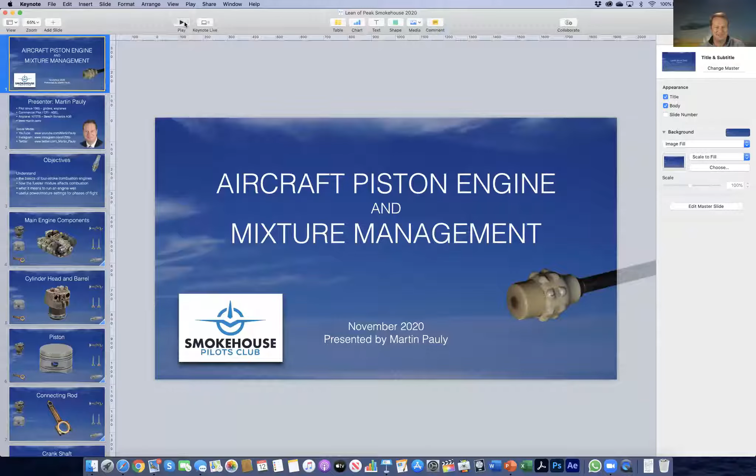All right. So this is me. Been a pilot for over 30 years. I started at the age of 14. Back when I lived in Germany, I flew gliders, and sometimes I joke that that's where my obsession for lean of peak comes from. And then later on airplanes. I have a commercial certificate. This summer I became a CFI. I was a glider instructor in Germany, then didn't instruct until this year, but picking that up again and enjoying it so far. The Bonanza that you see here behind me on the backdrop, that's mine, 70 Tango Bravo, an A36. That's been mine since 2012 with a normally aspirated engine.

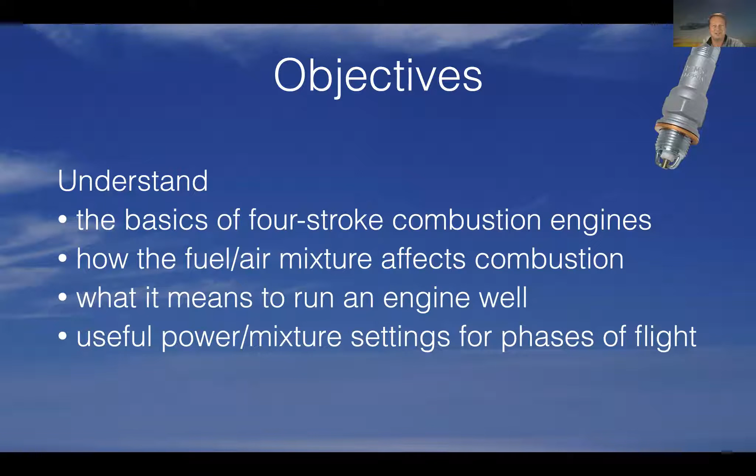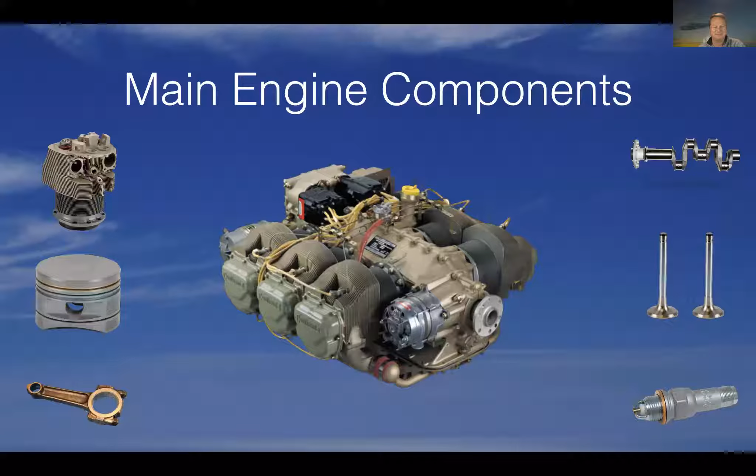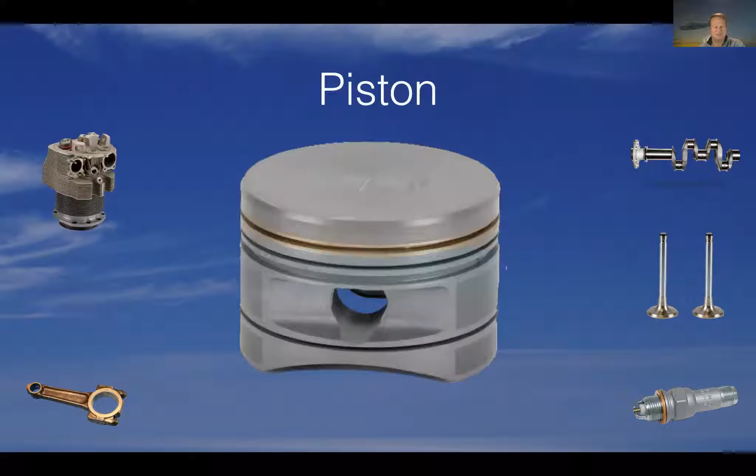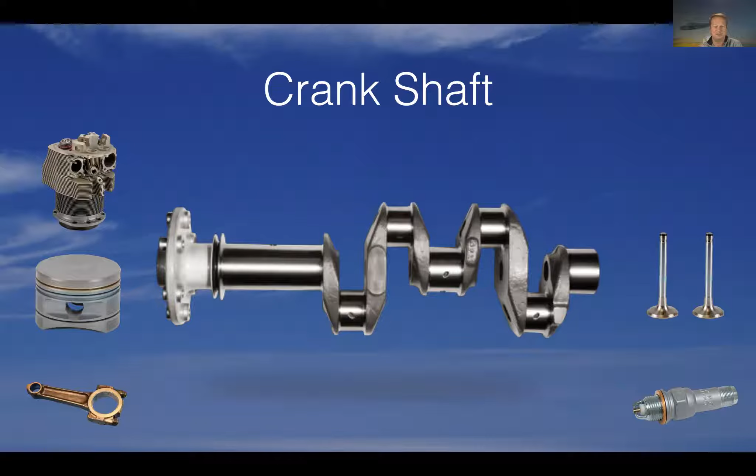All right, so here is a typical engine, 6-cylinder Continental here, and we got the case in the middle, right? And then we got the cylinders, cylinder head and barrel, inside of which we have a piston that's moving up and down. And the piston is connected to one end of the connecting rod. The other end of the connecting rod goes to the crankshaft. And that mechanism translates the up and down movement of the piston into rotating movement of the crankshaft. Bet you're all familiar with that.

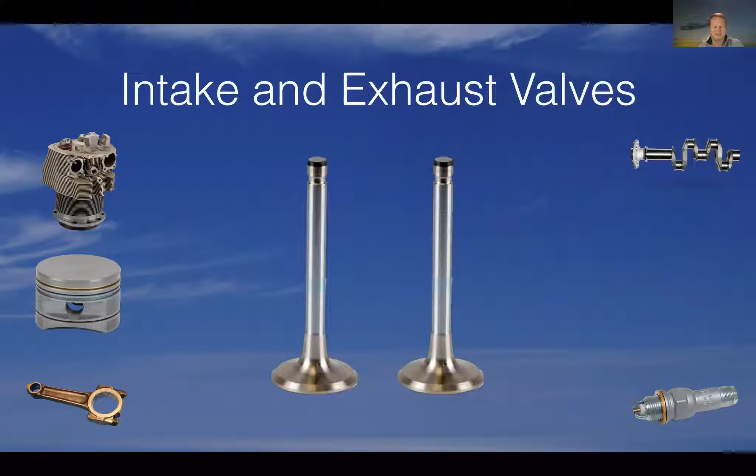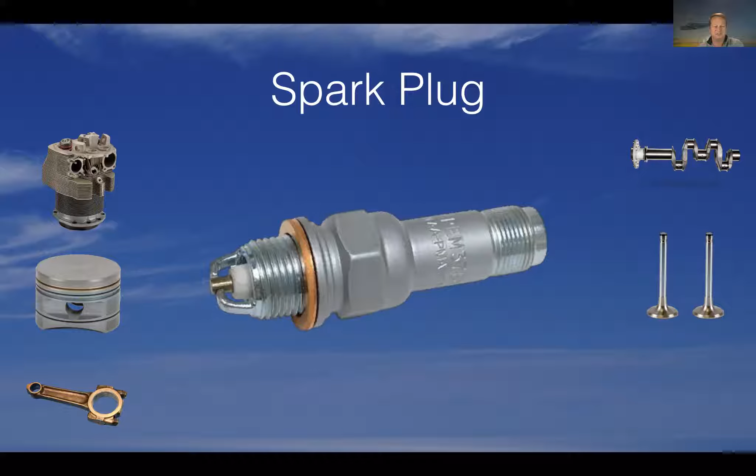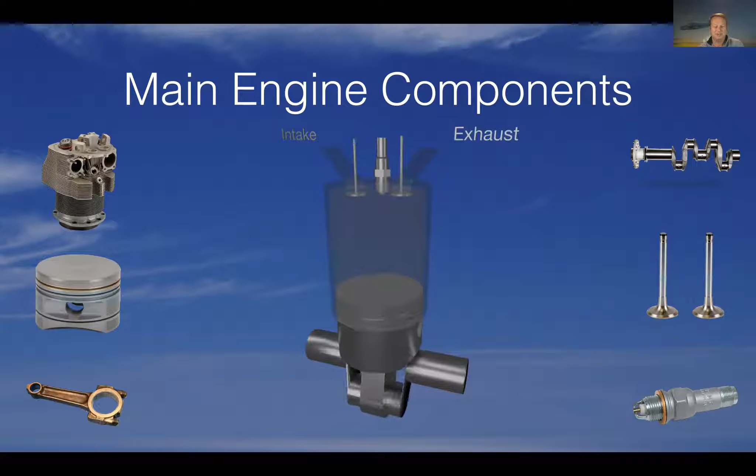Then we got intake and exhaust valves that open at the appropriate time to let air and fuel into the cylinder, or let the burned air and fuel out of the cylinder. And finally, a spark plug to ignite that fuel-air mixture. There's a lot more needed to make an engine, but those are the components that we are looking at tonight. And we put them together and we put them to work. It looks like this here, with the piston moving up and down, and the intake and the exhaust valves opening, and the spark plug firing at the right time. And let's look at this for each of the 4 strokes individually.

So starting with intake, you can see the intake valve, the left one, opening, and as the piston is moving down, it sucks in air and fuel, a lot of air and a little bit of fuel, into the cylinder. The next stroke then is the compression, where the piston moves back up, both valves are closed, and that air-fuel mixture is now compressed, put under pressure.

And just before the piston reaches what's called top dead center, when it's all the way up, the spark plug fires, this fuel-air mixture starts to burn, and as it burns and creates pressure and heat, that pressure is moving the piston down, and that is what's creating the power. And then finally, the exhaust valve opens, and the burned fuel and air that is no longer of use gets ejected. And then we start over.

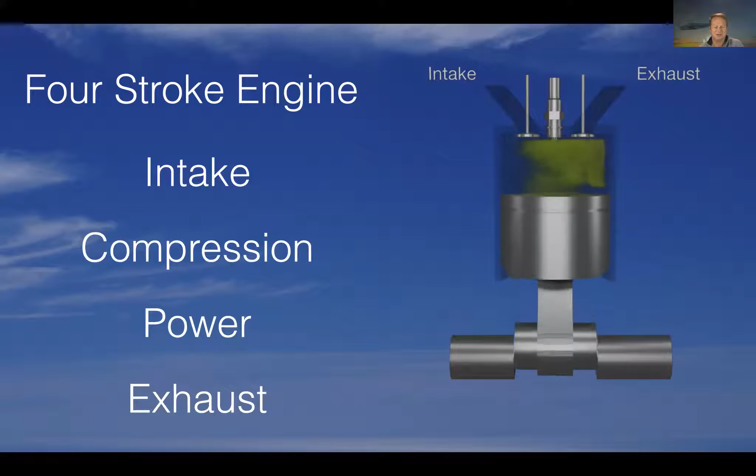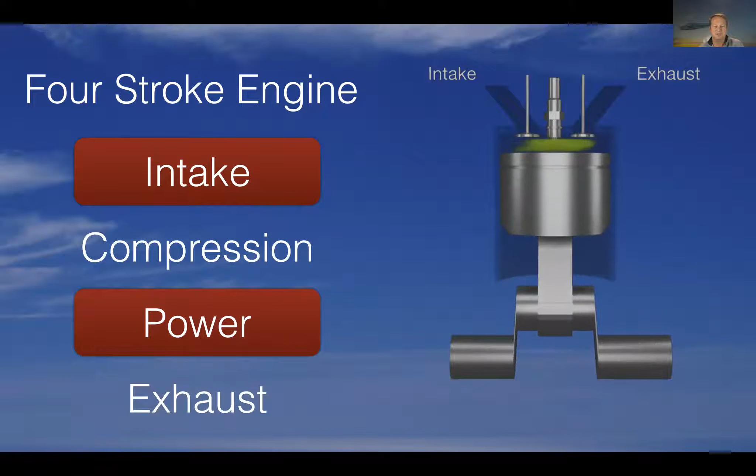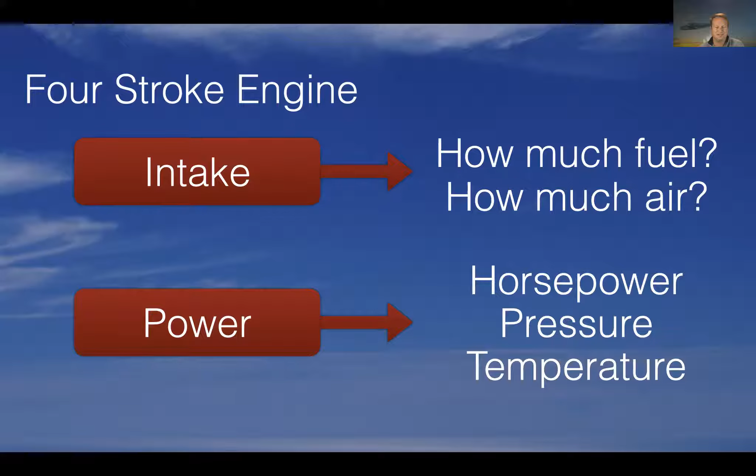Intake, compression, power, exhaust. And from here on, we're going to look at intake and power. I mean, compression and exhaust are important, but we don't really control them or get much out of it. Intake is where we have full control. We control how much fuel and how much air goes in. And then during the power stroke, we yield the results out of that, which is horsepower and pressure and temperature. And that's what we're going to look at here for the remainder of the time.

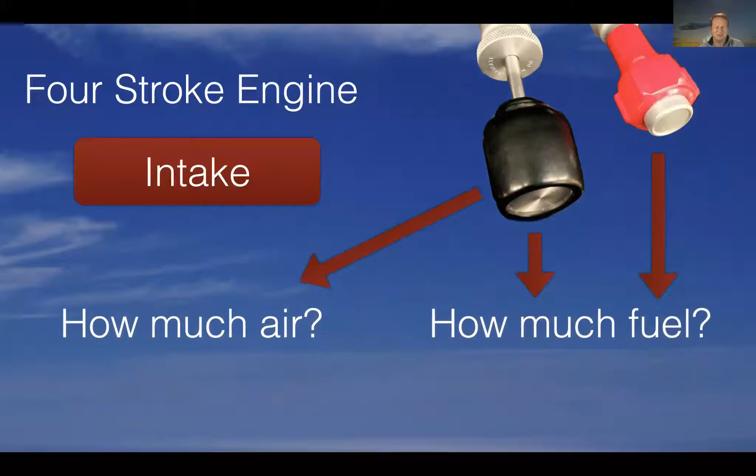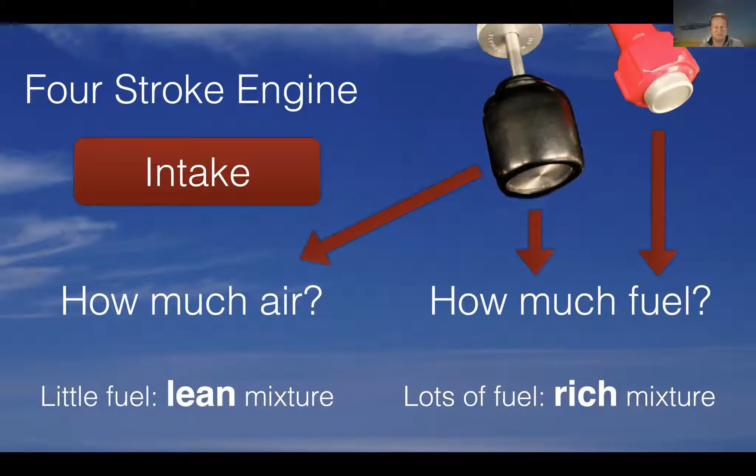How our choices of how much air and how much fuel get into the cylinder affect the outcome. We control that with throttle and mixture, right? Throttle controls air and fuel, and then the mixture gives us additional control over fuel. But so far, I probably haven't told you much that you don't already know. As we control that fuel, there are lean mixtures and rich mixtures, and a lean mixture is one with relatively little fuel. A rich mixture is one with more fuel.

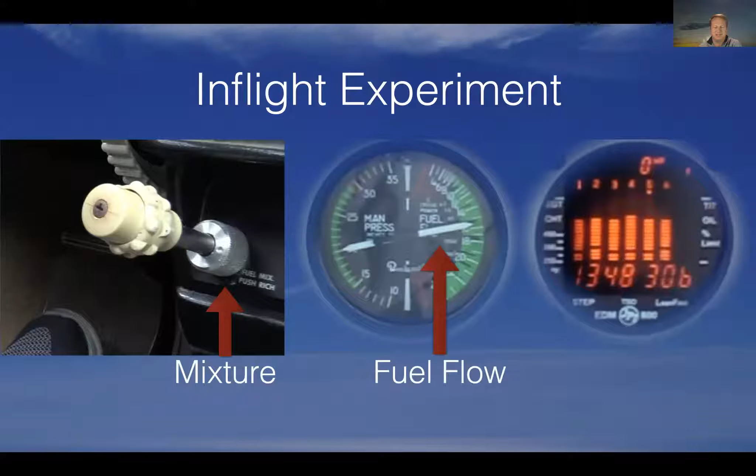All right, now let's make this a little more interesting and collect some data, make some observations. So this was taken in my Bonanza a few years ago in cruise, I think probably 8,000 or 9,000 feet high. Wide open throttle. This is a normally aspirated engine. And you can see here the mixture knob on the left. You can see the fuel flow gauge, showing about 15.5 right now. And then on the digital engine monitor, this is the old one before I upgraded to the EDM 930. This shows the readout just for one cylinder at a time of the exhaust gas temperature and cylinder head temperature.

So mixture, right? Everyone knows that knob from flying. Fuel flow, that's pretty easy to understand. If I pull the mixture knob out, the fuel flow goes down. EGT and CHT, many of you will know this, but here we're starting to get into terms that many pilots have heard about, but maybe they don't exactly know what they are or what to do with them. So let's look at those for a moment.

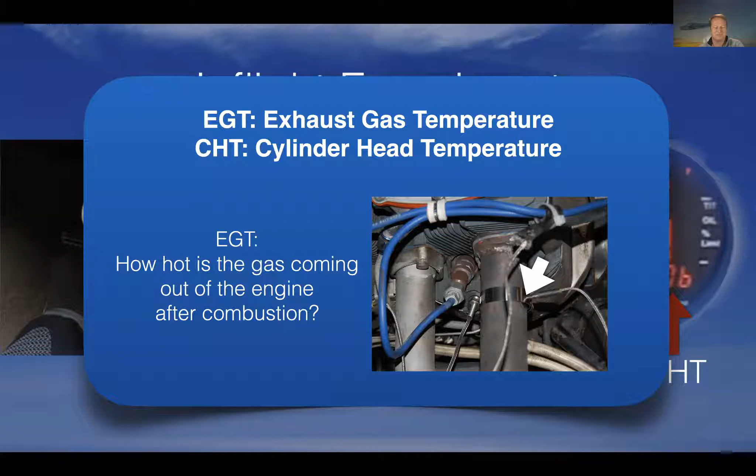The CHT, it's a different probe. It's a little hard to see. It's at the bottom here. The arrow points at it here. That measures how hot the metal of the cylinder is. So the temperature of gas and the temperature of metal. And we'll talk about what they're useful for and what to do with them.

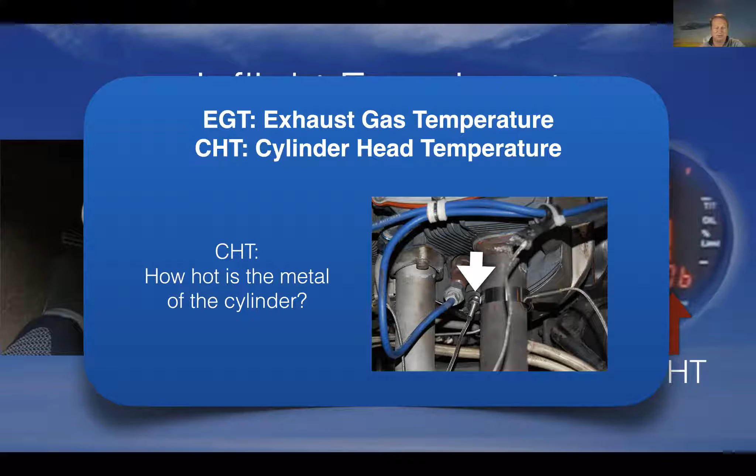But an analogy that may be helpful to think of it is EGT is a bit like the temperature of a flame on a stove, and CHT is a little bit like the temperature of the pan that's sitting on the stove that you're warming up with that flame. By changing the flame, you can change the EGT or the flame temperature very, very rapidly, right? You add gas, it gets hotter, the flame gets bigger. The CHT equivalent, the temperature of the metal of the pan, lags behind just because there's mass in that pan and it takes time to adjust to the changes of the flame.

And likewise, the EGT responds very, very quickly to changes that we make with the mixture and throttle, whereas the CHT always lags behind. It can take a minute or two after we make a change before the CHT stabilizes.

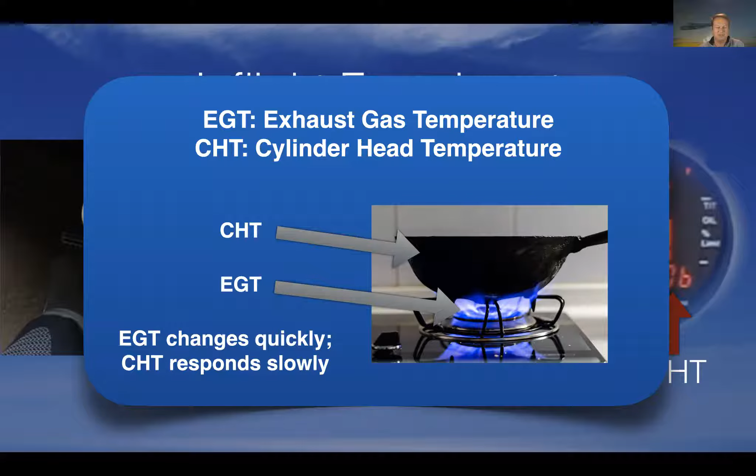So let's get back to the experiment here, and I'm going to show you what happens when I pull the mixture knob out. You notice here we have a starting fuel flow of 15.3 gallons per hour, which I'm reducing now. The EGT started at 1348 degrees Fahrenheit. And as I'm reducing the mixture, just observe what's happening. The fuel flow needle goes down. I mean, that's obvious, right? That's what pulling the mixture does.

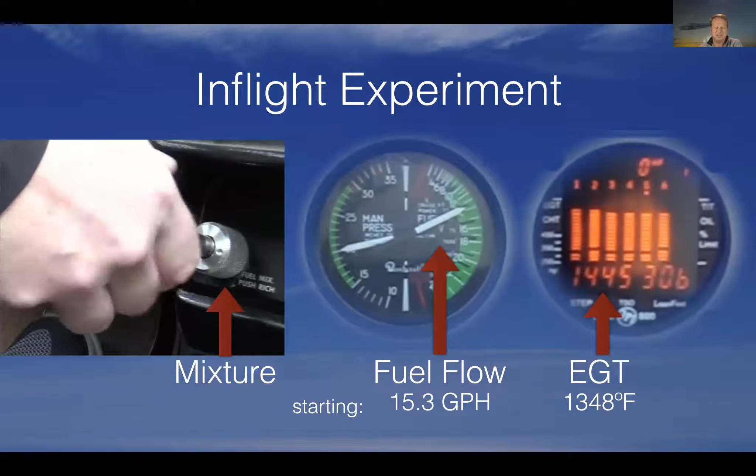Means less fuel. But the exhaust gas temperature, the temperature of the gas coming out of the cylinder after each combustion stroke, is rising. And now I'm pulling out and I'm not seeing much change. 1447 was the largest number here. It's kind of reaching a plateau. And now as I'm reducing the mixture further, the numbers are starting to go down again. 1420 now. Yeah, and here I stopped.

So what did we see? We saw the fuel flow that I very gradually moved from 15.3 gallons per hour to 13 gallons per hour. And we had an EGT that started at 1348 that rose to 1447. There was a peak there. And that in the end ended at 1415. So that's just a bunch of numbers right now.

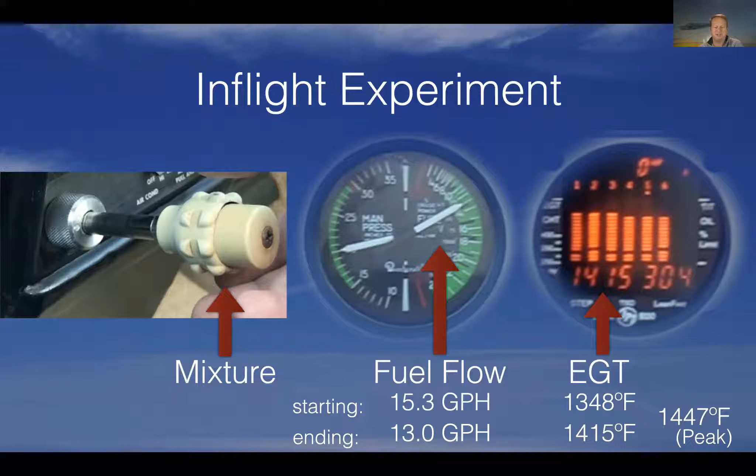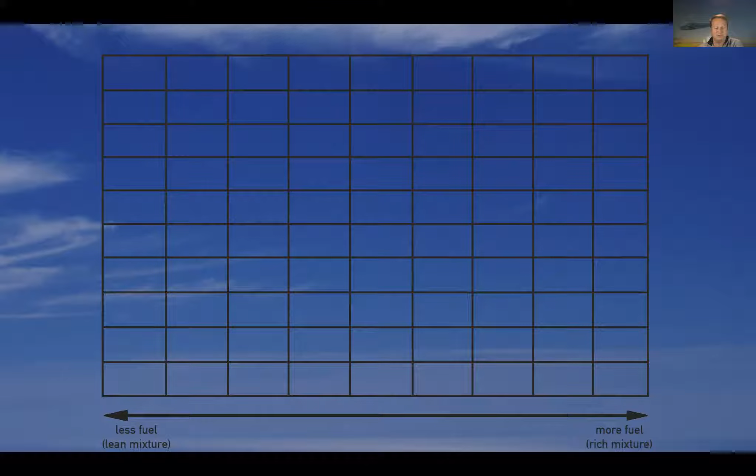And when we try to make sense of numbers of data that we record in an experiment like that, it often helps to show that in a graph, to plot the data. And that's what we're going to do here. So I have this graph here where the horizontal axis is the fuel flow. I got a lean mixture, less fuel on the left, and a rich mixture, more fuel on the right.

And I'm simply going to draw a line here that represents what we just observed for the exhaust gas temperature, right? From the right to the left, as I was pulling the mixture knob out, we saw the EGT rise and rise and rise, and then it slowed down, and there was a peak, and then it went down again. And that may not look all that exciting by itself, but let's stick with this a little moment and see what we can get out of it.

So first, I'm drawing this thick vertical line here to mark where the peak EGT was reached. That was the 1447, right? The EGT goes down on either side, and it divides this chart into a lean of peak side and a rich of peak side. That's literally all these terms mean. Everything to the right of this line, where the mixture is richer than when EGT peaked, is called rich of peak, and everything on the other side is lean of peak. And then we have peak itself, right? That's the one place where we got the maximum EGT.

But if people talk about lean of peak and rich of peak, well, that's what that is. There's that dividing line in this chart, and one side is rich of peak, and everything on the other side is lean of peak. I don't have numbers here on this chart, and there are a few reasons for that. One is the absolute numbers are really not important. Numbers depend a lot on a number of factors, including, for example, how far down the exhaust stack that EGT probe is mounted. So an EGT really isn't right or wrong or too hot or too cold.

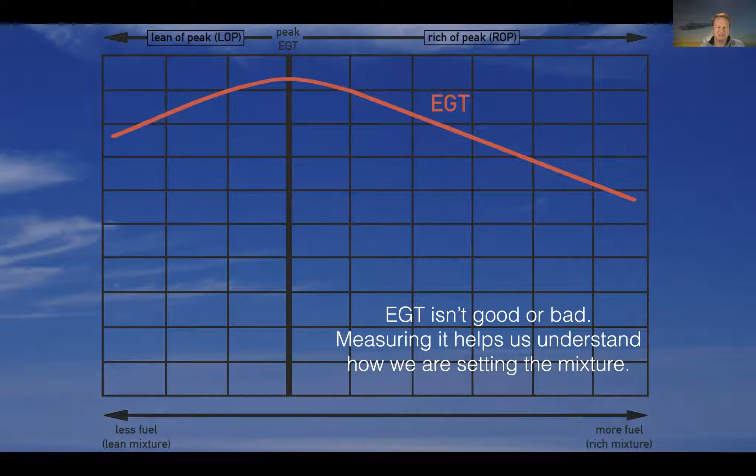EGT is a reference for us here to talk about this chart, to talk about mixture settings. What do I mean by that? Let me add 3 points that we observed in the little video earlier to this chart here. One is at peak, we had an EGT of 1447, and then to the right we had an EGT of 1297, and on the left 1417 on the lean of peak side. And the vertical axis here is degrees Fahrenheit for EGT.

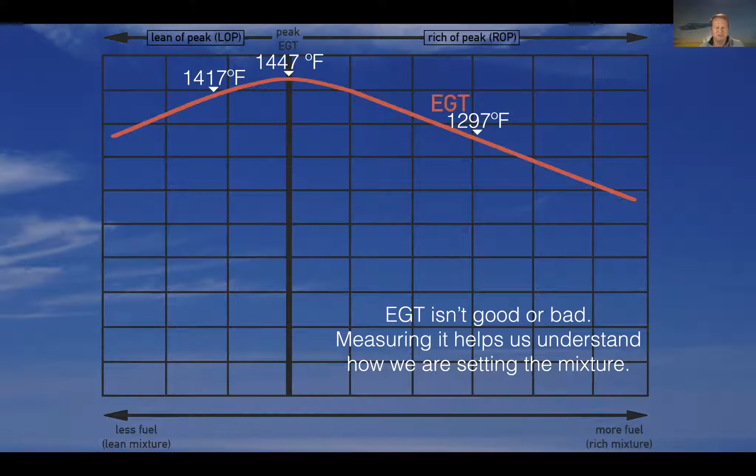If I want to talk about my mixture settings, I could use gallons per hour, or I could say I moved the mixture knob half out or so, but that's not always very meaningful. It turns out a very, very meaningful way to talk about mixture settings is to talk about how many degrees lean of peak and rich of peak we are.

So to use the example here on the left, when we have 1417 degrees Fahrenheit, that is exactly 30 degrees below the peak EGT of 1447. And we call that 30 degrees lean of peak. That is a mixture setting. And we'll soon learn that 30 degrees lean of peak is in many ways a lot more meaningful than saying, well, I leaned to 8 gallons per hour.

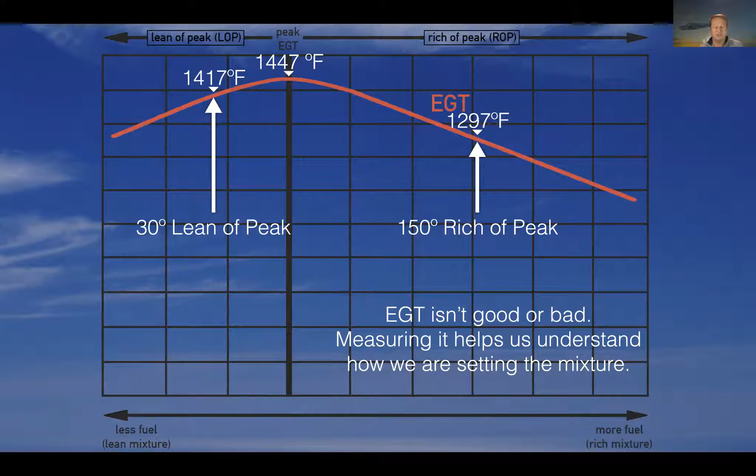Similarly, on the rich side here, this 1297 is 150 degrees below the peak of 1447. So we call that 150 degrees rich of peak. So you see what we're doing here. We're using EGT to kind of navigate on this chart, to talk about where we are with the mixture setting, and we do that by relating it to peak EGT.

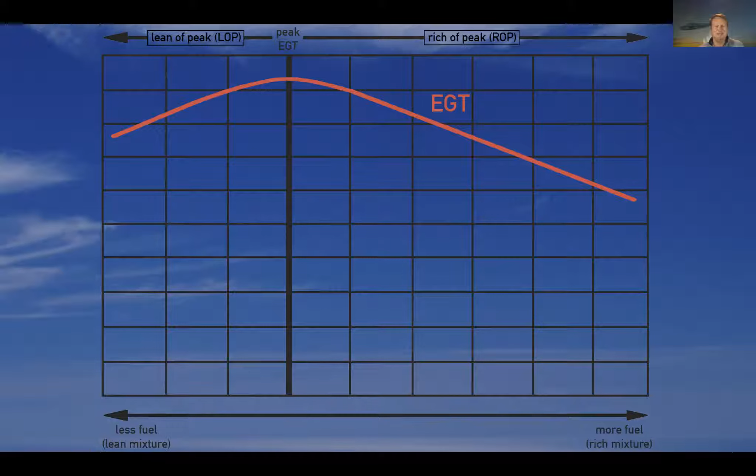Okay, so far we have this chart. We can talk about where we are on the chart, but what does it bring us? Right now we just have the EGT. We need to put something else on the chart to make it meaningful. And next we'll add the horsepower that the engine develops.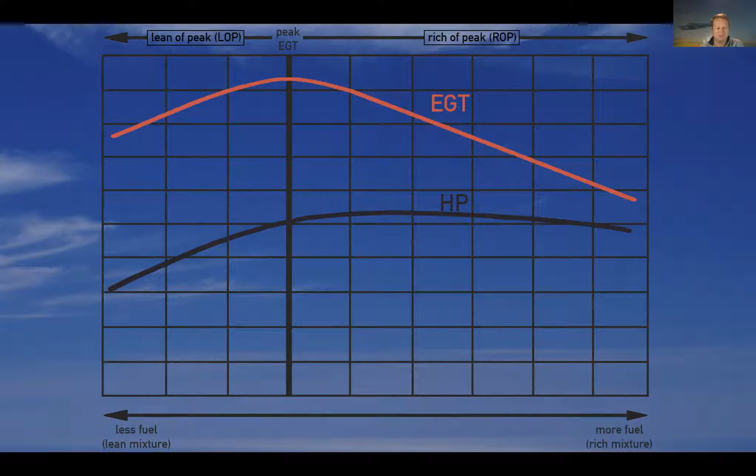Further, we can add a line for CHT, cylinder head temperatures. And this is assuming that we give the engine a little time to let things stabilize. How hot will the metal of the engine get with the mixture setting that we've chosen? That's what this CHT line suggests. And it also peaks again in a different place than the horsepower or the EGT.

So now we have something more useful, because, for example, if we wanted to produce maximum horsepower output, we could find out from this chart how to set the mixture to get there, and not just guess, but we would actually know it. Or if we wanted to get the CHTs cooler, we could use this chart to get an idea of what we need to do with the mixture to achieve that. So this is starting to look a little more useful.

So to recap, we have so far looked at the exhaust gas temperature. And again, there's no good or bad exhaust gas temperature, but it helps us understand where we are on this chart. We can communicate about this chart with 20 degrees lean of peak and 50 degrees rich of peak and the like.

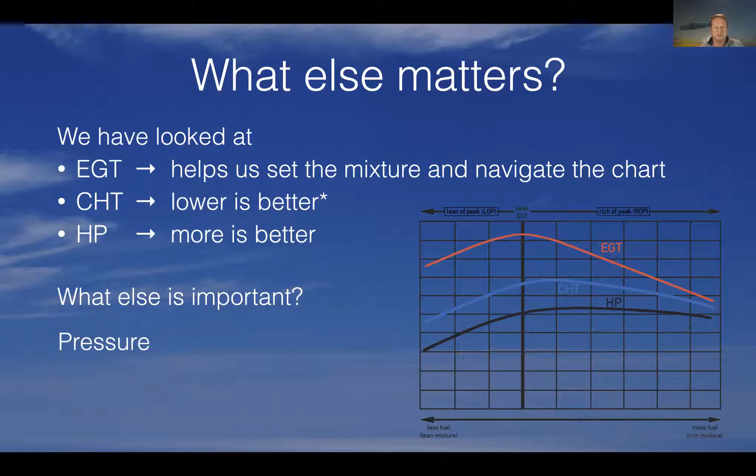Now there's no gauge inside the airplane that measures pressure directly or indirectly. However, on a test stand that has special probes to measure the pressure inside the cylinders, the internal cylinder pressure, ICP, you would get a curve that looks exactly like the CHT. The units of measurement, of course, would be different. But how it slopes and where it peaks is almost the same as the CHT.

So I'm not going to add another curve here. We're simply going to look at CHT to understand where we get peak pressure and how the pressure gets lower to either side.

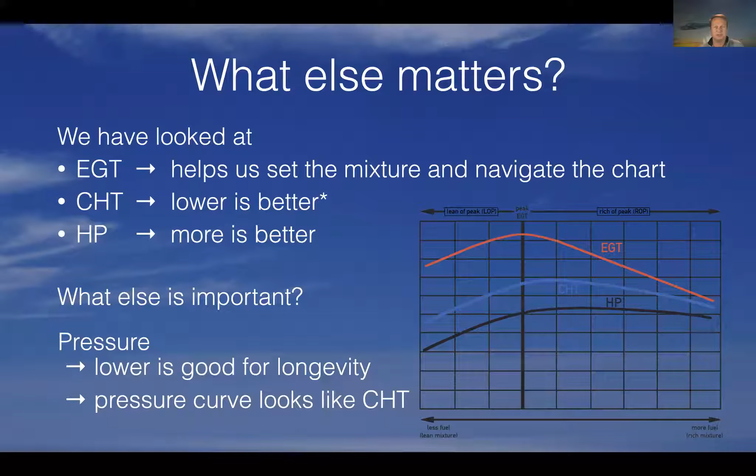So with all these parameters in mind, how should we run the engine? What do we want from the engine when we fly? We want power, as much as we need for the phase of flight. There can be very little for taxi or descent, and very much for takeoff and climb.

And the most power is achieved at approximately 80 degrees Fahrenheit rich of peak. So if that is the absolute most important, that's where we would set our mixture, 80 degrees rich of peak. And if that was the only thing that mattered, we'd probably be flying at that mixture setting all the time.

But there are a few other considerations, like fuel efficiency. What do I mean by that? Well, fuel efficiency, to me, is the number of nautical miles that I can squeeze out of a gallon of fuel, just like the gas mileage in your car, right?

And more is better. It extends my range, and it can even help with speed, right? Maybe I can skip a fuel stop by getting more miles out of the fuel that I have available.

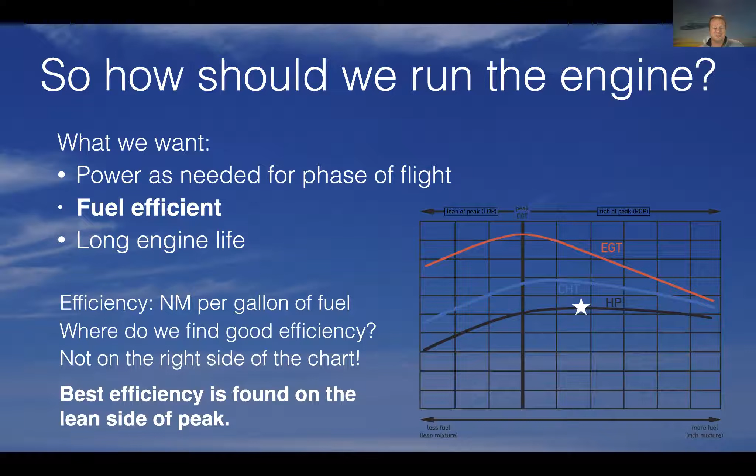That's not efficient. So the best efficiency is found here on the left side of the chart, and that's the lean side of peak. If we want the maximum miles per gallon, that's on the left side, on the lean side of peak here. And then finally, we want a long engine life. At least all of us who are paying for engine overhauls or replacement, I bet want that.

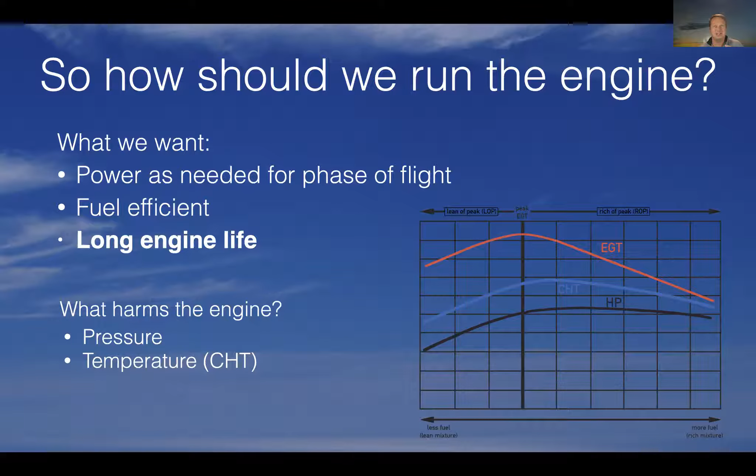And let's think about what harms the engine, and it's pressure and temperature. They work in combination. Pressure, if I push something too hard, I can deform it and break it. And if something gets too hot, it gets weaker. I make it more likely that that pressure will harm it. So unfortunately, the CHT and the pressure curve, they overlap. The point where I get the highest pressure is also the point where I get the highest temperature, where I make the assembly the most vulnerable to that pressure. So that's an important consideration.

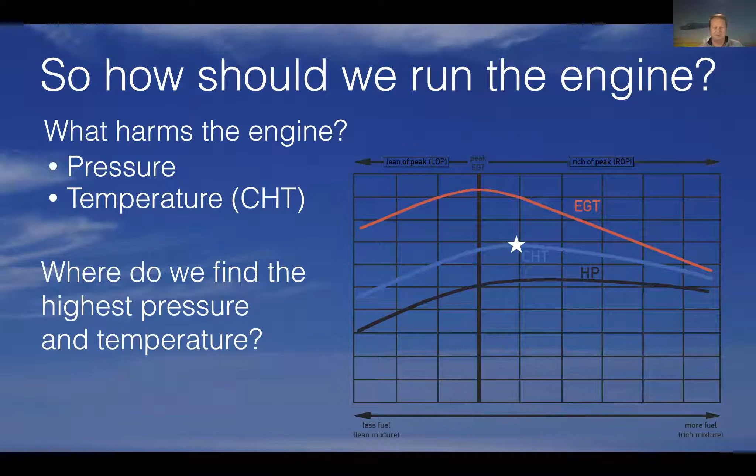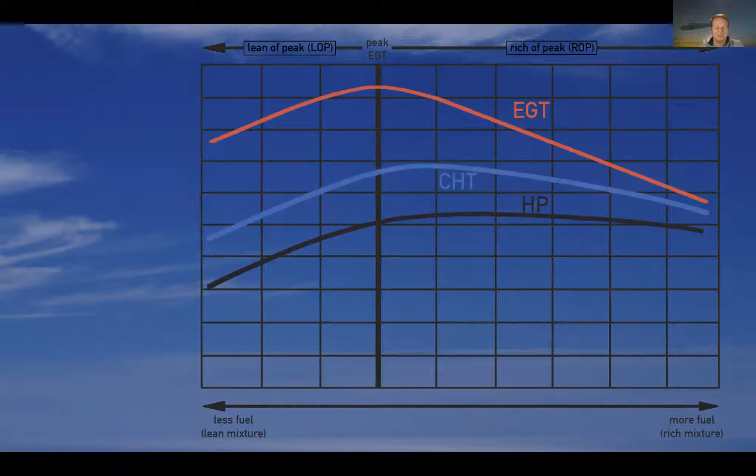And there's another name for this red box, sometimes called red fin. I believe Cirrus pilots use that term. It's a slightly different diagram showing things in a different arrangement, and then it doesn't look like a box. It looks like a little triangle, so they call it the red fin. But it's the same thing, same concept, really, just drawn differently.

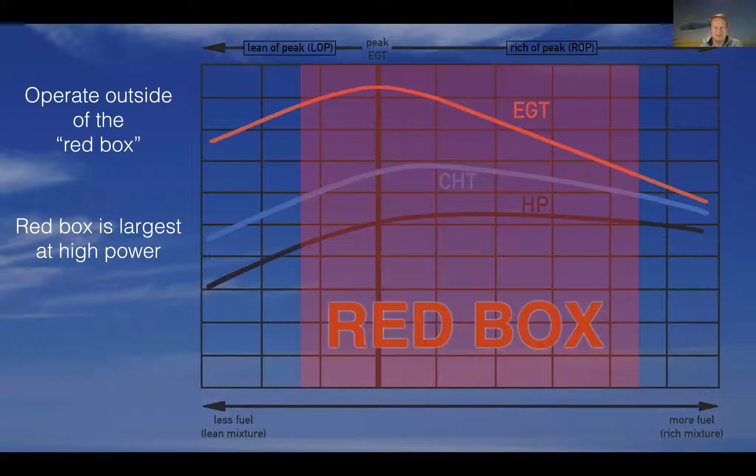The red box is pretty large. It occupies most of this diagram here at high power settings. Now, when we reduce the power, for example, if we climb with a normally aspirated engine and we get to less dense air and produce less power, or I pull the throttle back, that red box gets smaller. My peak pressure and peak cylinder head temperature is still at the same place, but the absolute pressure and temperature are not so high anymore. And that's why the red box gets smaller as the power output of the engine decreases.

And if I take even more power out, say 65% or below, the red box disappears. I can now do whatever I want with my mixture. I can run at peak horsepower. I can run at peak CHT if I want to. Maybe it's a cold winter day and I want to get maximum heating in the cabin. And the engine will not be harmed. So that's the concept of the red box.

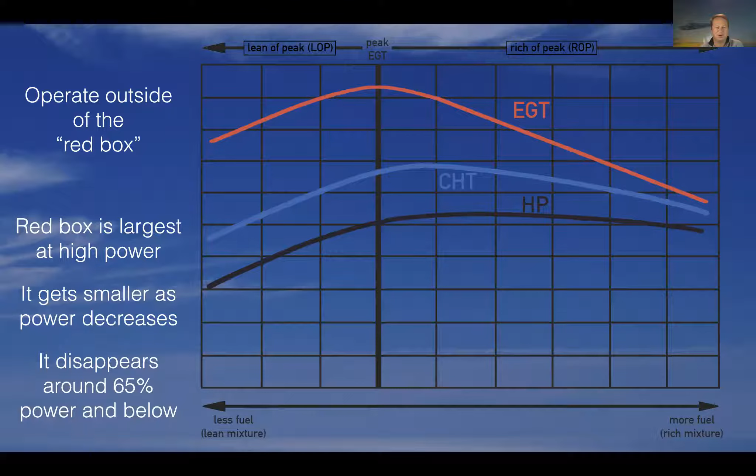Now, I told you earlier, I'd get back to the question of CHTs, should they be cool, should they be warm? And the one argument that's been around forever, that's undisputed really, is aluminum in particular is what we have to look at for our engines here, and the temperatures we find in the engine. Aluminum loses strength at higher temperatures. And there's this chart here. Temperature on the horizontal axis, and yeah, this is in Celsius. Here I got 3 lines with some useful Fahrenheit references, and then the yield strength on the left.

What's yield strength? That's the pressure that we can put on this aluminum, where exceeding this pressure, instead of just making it elastic, it would deform the metal permanently. In other words, it would break something. And you can see how that strength goes down pretty rapidly as temperature increases.

460 degrees is the maximum temperature authorized for my engine, the IO-550 in the Bonanza, for the CHT. And that's kind of alarming, right? Because if you look at what that means, the aluminum only has half the strength of what it has when it's cold at 460. So I don't like 460. I like to look at 380. It's kind of the maximum where if I exceed that, I need to do something about it to get below 380.

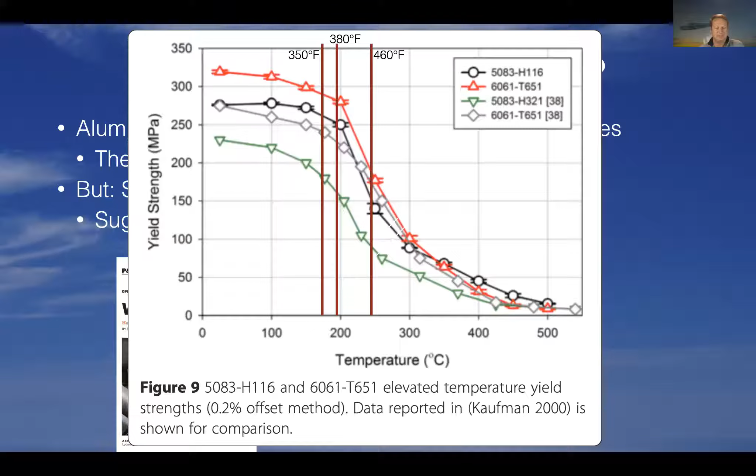There's another argument, and it was recently made this summer by Mike Busch, and here's an article from AOPA Pilot. What he says is there are deposits on the valve stems that increase if the temperature isn't hot enough. If the valve stem is too cool, there's condensation, and some deposits then get onto the valve stem, and they can make the valve sticky.

I haven't studied this enough, to be honest, to have a really good opinion. I haven't heard a lot of people other than Mike talk about this. So I can't tell you that this is right or this is wrong, but I did want to throw it out here because it is an interesting discussion going on these days.

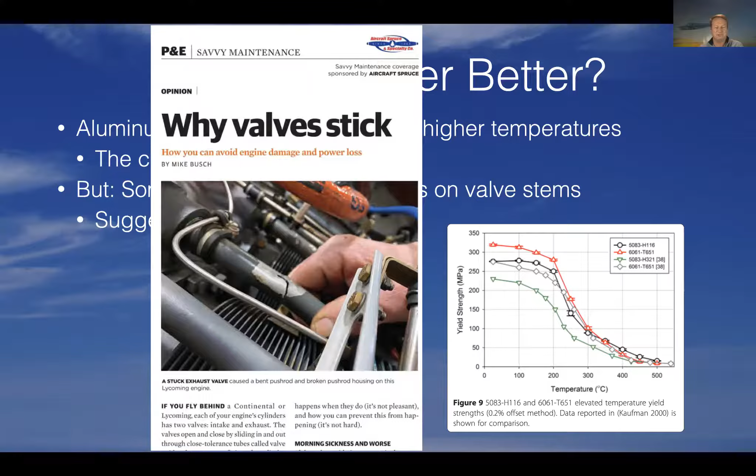What Mike suggests, oops, let me go back here, is to operate with CHTs between 350 and 400 degrees. And he hints that this may be more important for Lycoming engines than Continentals, because Lycomings have a different design of the valve stems. They run a little cooler than Continental, and that may actually, ironically, be harmful for them, the more efficient cooling.

What I can tell you, I ran my Continental IO-520 to 2,600 hours, running it with the motto of making it as cool as possible. So a lot of people have been successful with cooler is better, and I guess time will tell just how important this minimum temperature is, if you will.

One thing I would stress here is if you want to pick your poison and go really, really hot or really, really cold: really, really hot, think 500 or more, can damage your engine in no time at all. I mean, we're talking minutes at those high temperatures, and you're not far off from detonation and other bad things, and that quickly leads to a spiral that, if you don't react very quickly and do something about it, the engine may be destroyed in flight.

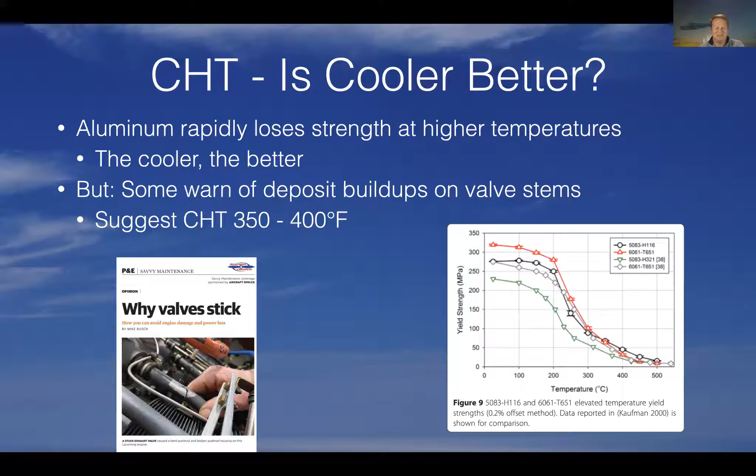Okay, so now let's get to the application. How can we use all of what I talk about here in flight? And I'll apply that to an airplane like my Bonanza with a normally aspirated engine. If you have a turbocharged engine, then some things will be different. But let's use it as a learning tool to understand how we can use the mixture control to our advantage in the different phases of flight.

So let's begin with startup, and I would say that the two most important things here are, one, make sure the oil is warm enough so it can provide lubrication, right? We're getting into cold season here, so preheat the engine. That is really, really helpful, and aim for low RPM when you start.

There's probably no easier way to ruin an otherwise perfectly good engine than starting it cold and having the throttle forward so that it revs up to 1,500 or 2,000 RPM right after starting, right? Cold, no oil yet. That's where a lot of damage is done. And so if you preheat and figure out your throttle setting for a low idle on start, that will be very, very good for your engine.

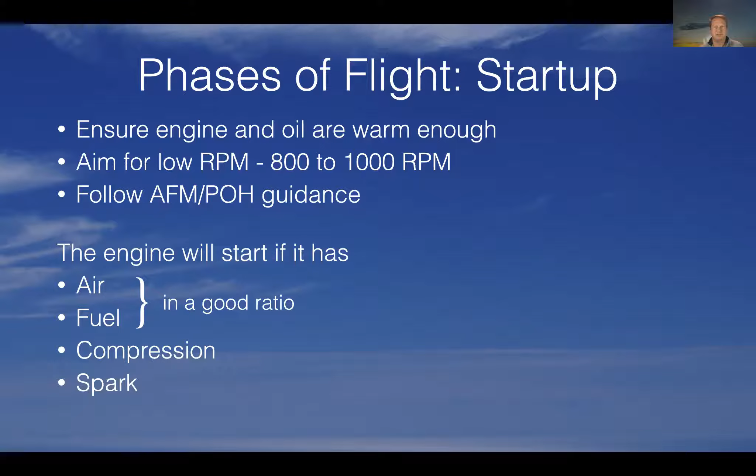Compression and spark, as long as everything is in good working order, if you crank the engine, you have compression, you have a spark. You also have air, because you're not yet sucking in much, so you have ambient air pressure going to the intake port. So really, what you control is the fuel. And if you have trouble starting the engine, that means that you either have too much fuel or too little fuel. And it's just a matter of understanding your fuel system and getting that mental picture of how much air is there, how much fuel is there.

Did I flood the engine or did I not give it enough gas, and then correct it. That is true even for the dreaded hot start, right? If you have trouble with that, again, air, fuel, compression, and spark, and it'll work. And in a hot start, what I often see is that people use too much fuel, and then they might think they have too little, and they add even more, and they make their lives even more miserable.

But it's hard to give very specific guidance here because the specifics depend a lot on the aircraft and the engine that you have, and the fuel system in particular. But understanding that fuel system and understanding how much fuel and how much air is in the cylinder is the key to a successful start.

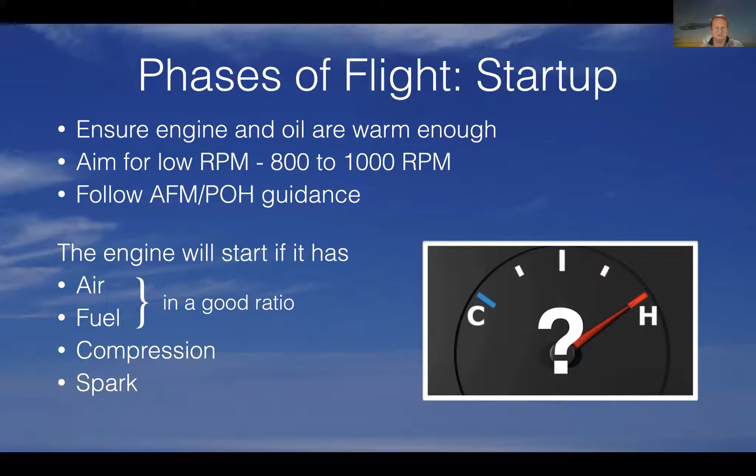Let's say we get that successful start accomplished, and now it's time for taxi or anything we do on the ramp. What I like to do is lean very aggressively for any ground operation. And with aggressively, I mean to the point where further leaning would make the engine run rough and stumble. That helps prevent spark plug fouling, and doing it aggressively will help you not forget to go rich again before

you go to takeoff. Because if you have the mixture knob pulled so far back that it almost stumbles, an attempt to go full power with the throttle would kill the engine, as opposed to taking off with a half-rich mixture where we might end up in the red box because the fuel flow isn't high enough. So if you do lean a lot, you prevent that possibility on takeoff.

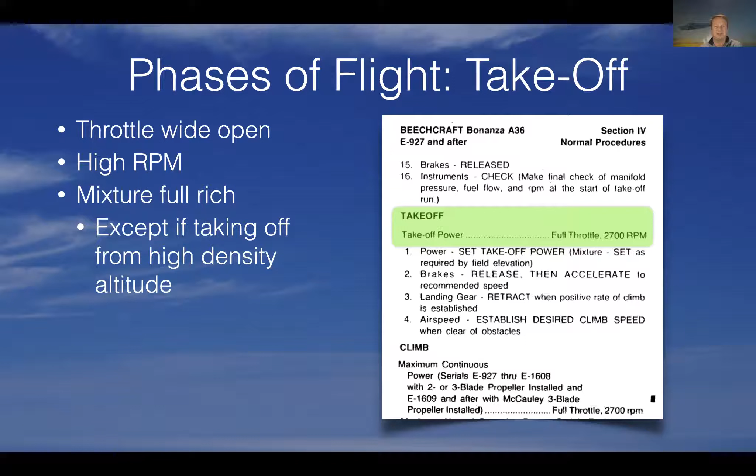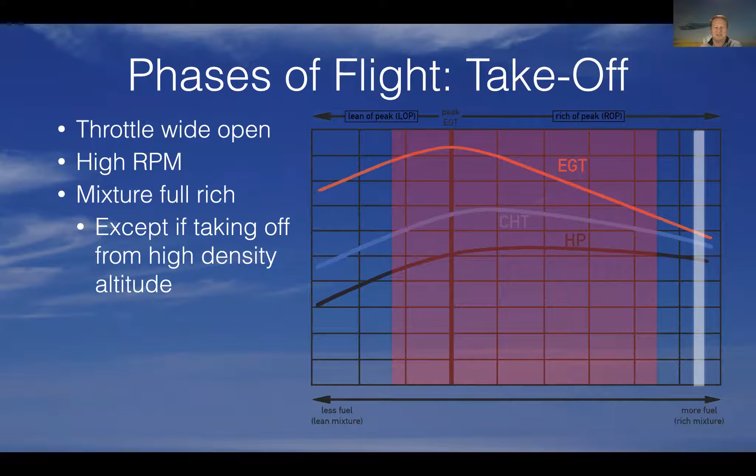Now, initial climb, we're a couple of 100 feet in the air, and what do we do now? And there are different schools of thought, different opinions. What I say is, don't change anything. Don't go to 25 squared or whatever people may tell you. Again, your POH may have limitations for how long you can run at full power or full RPM, and of course, those are important. But absent those limitations, just leave everything the way it is for the initial climb.

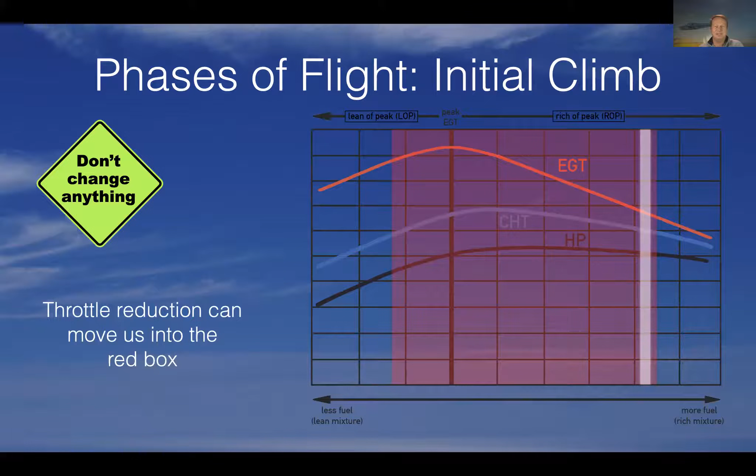And here's why. If I reduce the throttle right now, with a good intent of not working my engine too hard, most of our airplanes are set up such that full throttle gives it an extra little bit of fuel, and it does that so that I'm very, very rich and I'm not in the red box. Now, if I reduce the throttle, I get a fuel reduction, and that can take me into the red box. So I'm actually getting into the more harmful operating area for the engine. Therefore, I leave everything forward, throttle full open, for the initial climb.

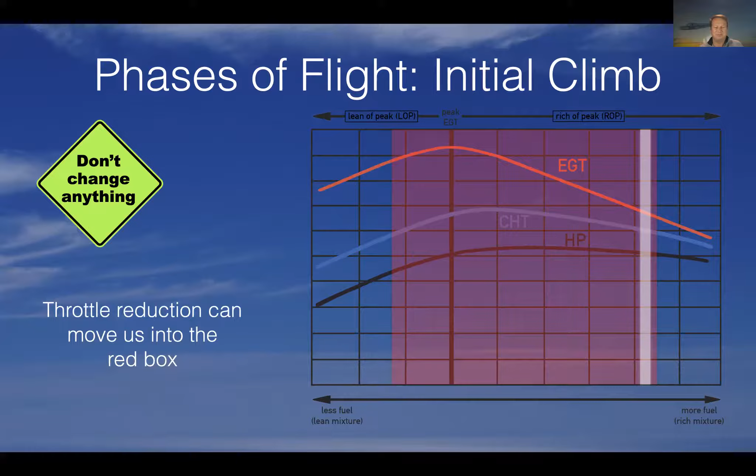Now, let's look at the rest of the climb here. And again, my POH says I can run full throttle, 2,700 RPM all day long. Most of the time I climb rich of peak. It is possible to climb lean of peak. Climb rate's reduced, and I climb more slowly. The vertical speed is slower, so the climb takes a little longer. But it's a choice I can make to go rich of peak or lean of peak. So let's look at either one.

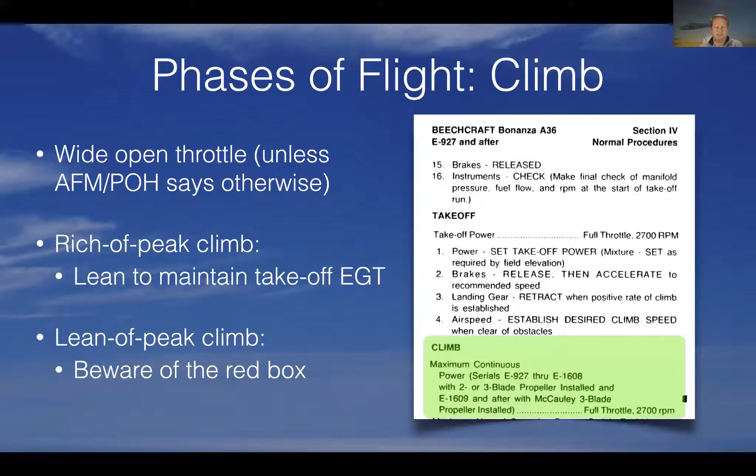Rich of peak, this was where I was for takeoff, right? And everything was good. And as I climb, I get into less dense air. So my fuel air mixture, unless I have an altitude compensating fuel pump, gets richer.

So as I climb, I can lean. And it's easy up to that point, but how much exactly should I lean? And the answer is, look at your EGT. Pick any one cylinder that you have on your engine monitor and look at the EGT as you apply full power on the runway, at or near sea level. And say that EGT is 1300.

Now, as you climb, that EGT will be lower and lower as the fuel air mixture gets richer. Simply lean to keep the EGT at 1300. And that means you keep the picture here with the highlighted bar on the right. And that will be a good power setting for high power without the damaging CHTs and pressures. It's called the target EGT method. So note on takeoff what EGT you get and simply lean to keep that EGT.

If we climb lean of peak, we've got to be careful, because if we climb now and get into less dense air, our mixture gets richer again, and that takes us into the red box as the moving bar here just showed. And that is why a lot of people say you shouldn't climb lean of peak. There's nothing really bad or dangerous about it, as long as you make sure you stay on the far lean side. But if you neglect the mixture knob here, if you don't pay attention, you get into the red box. And if your power is still high in the climb, then that could obviously be a problem.

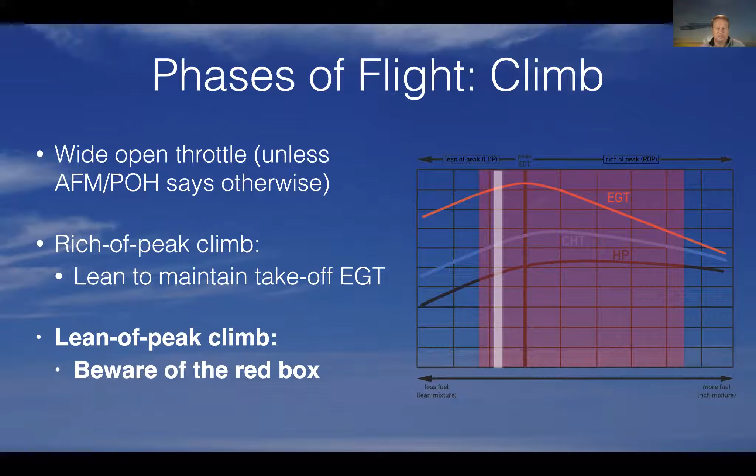Okay, climb is behind us. We're in cruise, and again, we have a choice. We can cruise rich of peak or lean of peak. And the values that I give here as guidance are very rough, right? They depend on a lot of things, but roughly speaking, for best speed, aim for about 150 degrees rich of peak. Maybe a little lower if you're not making a lot of horsepower, if you're higher up. And that's slightly rich of the 80 degrees rich of peak of the horsepower curve, but it gives lower CHTs and lower pressures than at peak horsepower.

And by the way, I should mention here, when I say something like 150 degrees rich of peak, we explored that earlier between the peak line and a cylinder. That vertical difference was 150 degrees. Now, our engines have multiple cylinders, right? 4 or 6. So if I put my 4 cylinders on the chart here, ideally they'd all be in the same spot, but they never are. Nothing is quite perfect in a piece of machinery like this. So we'll end up seeing them in slightly different places.

And the 150 degrees rich of peak means I reference the cylinder that is closest to the peak EGT line on this curve. In other words, if I were to lean and these four circles were going to start moving to the left, that leftmost one would be crossing the peak line first. That's my reference for rich of peak, and there's a similar reference we'll see on the lean of peak side as well.

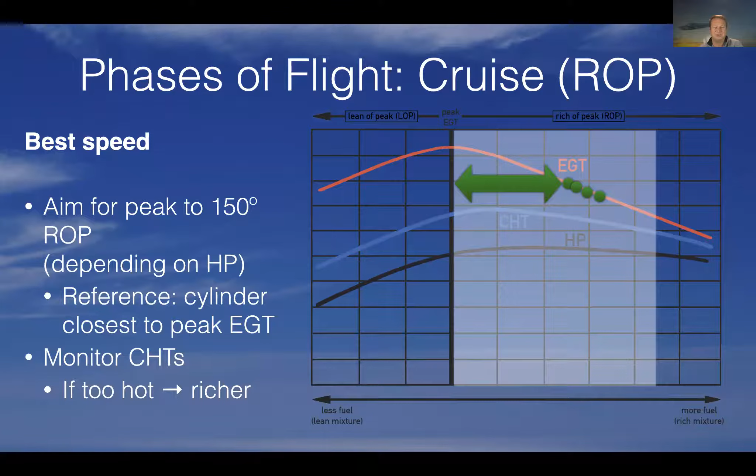Now let's look at the lean of peak cruise. And again, it depends a bit on the power setting, but roughly speaking, a window between 20 degrees and 80 degrees lean of peak is a good place to aim for. In my normally aspirated Bonanza when I cruise at 7 to 10,000 or higher, I usually aim for 20 degrees lean of peak. Same idea here with multiple cylinders. We reference the cylinder that is closest to crossing peak if I were to richen the mixture in this case.

I also monitor the CHTs. On the lean of peak side, CHTs are usually cooler. You see how steeply the slope goes down for the CHTs on the lean side. But if I were to find uncomfortably warm CHTs on the lean of peak side, for example, in a lean of peak climb that I talked about earlier, go leaner, right?

People have gotten into trouble when they experiment with lean of peak and they say, well, we don't want to overdo it, we don't want to go too lean, right? Let's just see what a little leaning does, and that has the opportunity to get us into the red box where cylinder head temperatures are high.

So when going lean of peak, and we're running too hot on the CHTs, go even leaner, and that will cool things down. If it doesn't, and you'd have to lean to the point where the engine starts to run rough or stumble, and you're still hot, something isn't right, then go full rich and work out whatever the problem is. I mean, don't stay there. But normally, if everything is working well on the lean of peak side, you can make it cooler by leaning more.

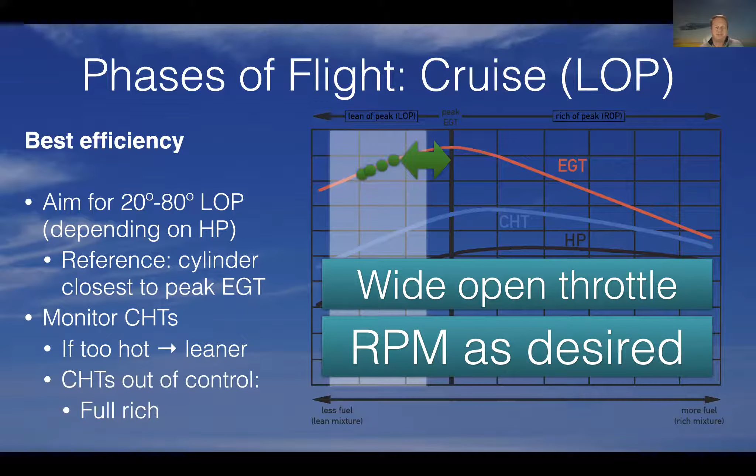Descend, well, we don't need much power for the descent, right? So we got lots of options here. We can descend with little power and slow airspeed, or we can leave the power in and enjoy the really nice airspeed on the way to the destination. I can go back to rich of peak. Some people, even that like to cruise lean of peak, they go rich of peak for the descent in preparation for landing, right? Nothing wrong with that.

However, now we have kind of the opposite of what we discussed in the climb. Because the air will get denser in the descent, the mixture will get leaner. What does that mean? If I don't pay attention and I have high power, I might move inadvertently into the red box on the descent. And we got to pay attention here for the very same reason we have to pay attention in a lean of peak climb, right? If we have high power and we're not watching this, we could end up in the red box. The only difference is that in the climb, we always have high power, and in the descent we might have lower power more typically, but the concept is equivalent.

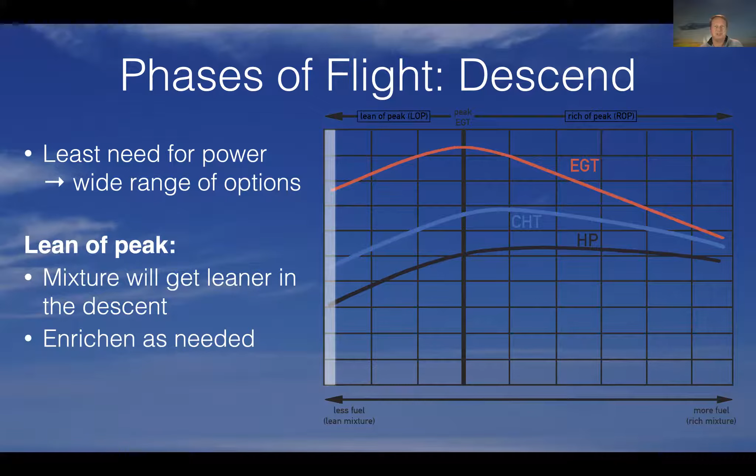On the lean of peak side, the mixture will also get leaner in the descent, and I got to enrich it to compensate for that. And if I forget to do that, I get leaner and leaner and leaner. Ultimately, the engine will run rough or stumble. That's my sign to twist the mixture knob and move it forward a little bit. But there's no chance of getting to those damaging pressures or temperatures here in the lean of peak descent.

And then it's time to land, right? All good things need to come to an end. And I guess there are two schools of thought here, and neither one is right or wrong. They're just different. Some people like to have the mixture rich, prop high before landing, right? The idea is simply that they want to be prepared for a go-around and have nothing but the throttle to worry about in the case of a go-around, and control power with throttle on the way in.

The other one is I leave the power setting and the mixture where they were for my descent, even a lean of peak descent. Still control power with throttle. The lean mixture causes less fouling of spark plugs than the rich mixture. The lower RPM creates less noise. Airport neighbors will like that. And the mixture will already be leaned for ground operations when I taxi back to the hangar.

The downside is if a go-around is required, now I have more things to do, right? In particular, I have to push the mixture forward before I apply full throttle, like I discussed when we talked about ground operations initially. Otherwise, the engine might go out, and that could be a bad surprise when you're trying to go around.

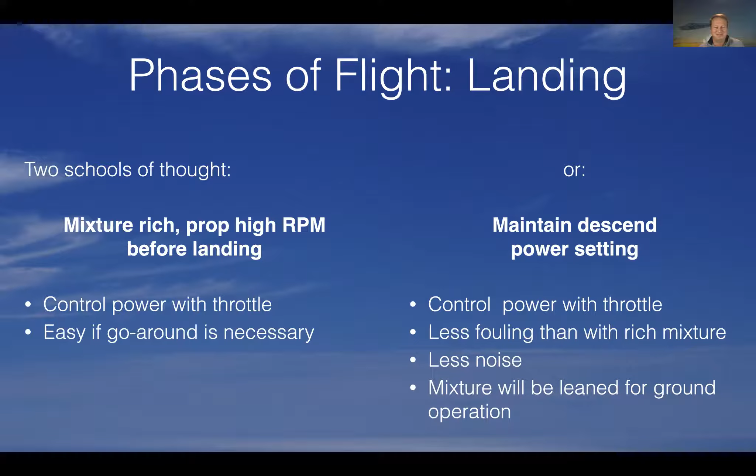Okay, so that's what I had prepared. There are a couple of resources I want to point you at if you want to learn more about it. One is the Pelican's Perch column by John Deakin. It's a wonderful set of articles that John wrote. They are available on AvWeb, free of charge. So if you do a Google search for John Deakin Pelican's Perch, you'll find dozens of articles about engine and propeller and mixture and fuel systems and whatnot.

And John is a pilot who not just understands the technology behind it, but he also knows it from the practical application as a pilot. And his writing style is very enjoyable.

Another one is a video that you can find on my YouTube channel. If you do a search for lean of peak on YouTube, I think that's all you have to type in. It should be one of the first hits there. You see lean of peak engine operations explained. That goes over some of the things I discussed tonight, more with a focus on lean of peak. But if you want to review the concepts like how EGT, CHT, and horsepower depend on your fuel flow, that you can all review there in that video.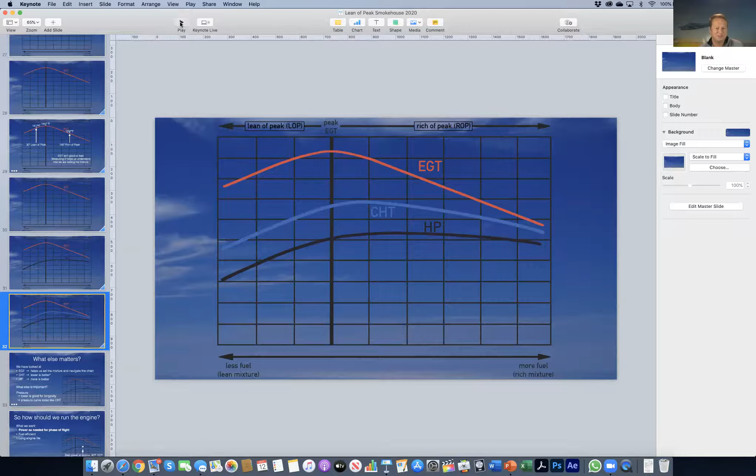carbureted engines, they have a harder time than fuel injected engines to get the same fuel and air mix to each cylinder. You get more variation from cylinder to cylinder. That's just by the nature of how they work. It's less precise. And if you're on the rich side of peak, I mentioned earlier that the horsepower line is really flat, right? You might be close to peak EGT on one cylinder and far on the rich side on the other, and they develop about the same horsepower.

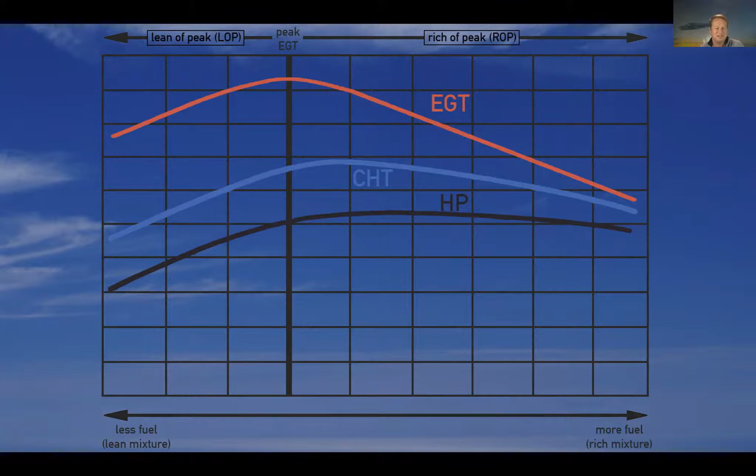Now, imagine pulling your cylinders all to the lean side and having that same spread. It's easy to see how with the steeper slope of the horsepower curve here, you have a lot more difference between horsepower from cylinder to cylinder. And that's perceived as roughness, right? If your cylinders are not getting the same fuel air mixture, the engine runs very rough, and well, what do we do? We enrich it until it runs smooth again, and that will probably take us back to the rich side of peak. So that's the reason why, generally speaking, a fuel injected engine is easier to run lean of peak than a carbureted engine.

But the other reason is lean of peak was big in the airline piston days, when they flew across oceans, or even in World War II when bombers and fighters needed long range. Lean of peak was a military secret in World War II, because it was a strategic advantage for the armed forces. And then the jets came, and that changed everything. So we kind of forgot about lean of peak. And it wasn't until about 20 or 25 years ago when the concept re-emerged.

And at that point, for whatever reason, I don't know how it started, a lot of the pilot community had convinced themselves that lean of peak was bad, should be avoided, because it would damage your engine, it would burn your valves, and do all these bad things that scientifically we understand it doesn't do. But all those old wives' tales were created, and your POH may have been written right around that time when the assumption was that lean of peak is a bad thing.